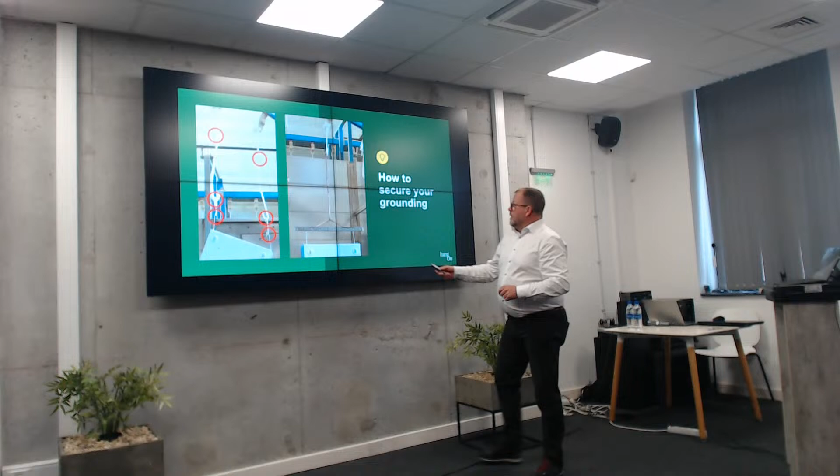You remember the T-bar we had before with the drill hole? Here is another alternative, and this is our alternative. Here is where you hang the hook inside, up here, so you always protect your grounding point. It makes a huge difference in your performance, I must say.

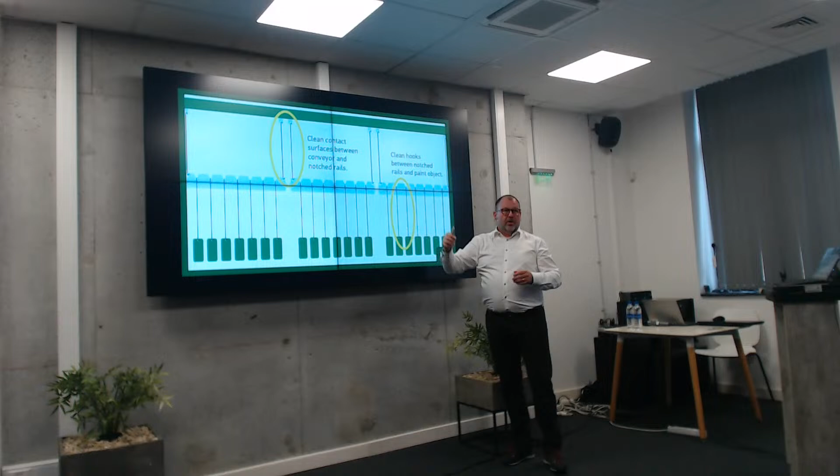And then we come to the plant. Of course, this is not good grounding, but that you know, that's for sure. What you need to do is secure from the conveyor, either from the small tabs on top or from the notched rail. You need to secure good grounding from the conveyor through all the steps down to the object.

And when it comes to the line itself, the conveyor should not be grounded into an electrical cabinet. The conveyor should go down into the soil. You dig down a big copper plate in the soil or pull down a spike in the soil, and that's where you connect your grounding to the conveyor.

And of course, you need also to check from time to time that you don't get powder up in the conveyor track, in the powder booth. That can also happen.

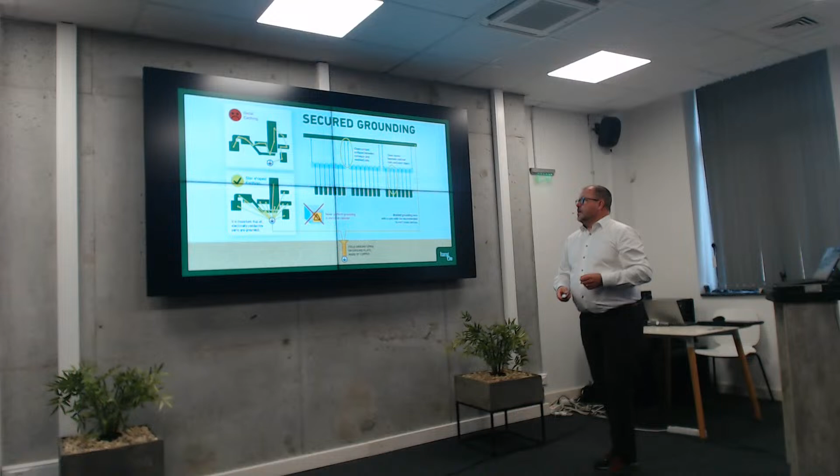When it comes to grounding in the application equipment, you have the choice of a serial earthing or a star-shaped earthing. We suggest you go with star-shaped, because if you get a cut in one line here, there is only one part you need to repair. If you got the cut in this line, the whole application can be without any proper grounding.

Yes, grounding has a big impact. It's very important. You need to secure it to have this productivity. Especially, now we are talking about easy objects. Think of a more difficult object, a cabinet or anything like this, where you should go inside, paint inside. And if you do a manual coating, for example, you can spend much more time to make the same coating operation.

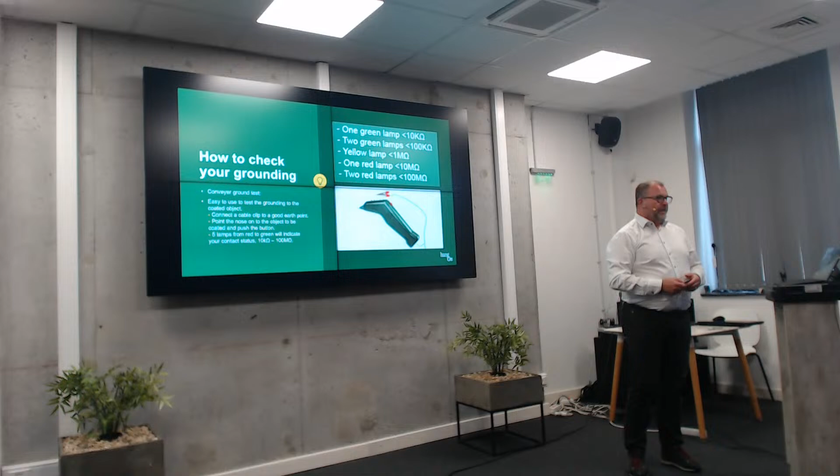All of these things is of course regulated, and what we are talking about is the ATEX system. What many people don't know is that you, as responsible for coating lines, must make a check of the whole line every year and document that everything is properly grounded. But ATEX is so much more. You need to check all these ATEX points every year and make a documentation. And do it. Please do it.

Because if something happens and you have an insurance company coming to you, and they know a little bit about ATEX, they will ask for this documentation. It doesn't take a long time, and you can take help of professionals to do it if you want.

So that was all regarding grounding. Thank you very much. Any questions, by the way? We answered everything, I don't think so. But good, thank you.

So, ladies and gentlemen, I show you the latest technology in powder coating.

Everyone knows we have the hot powder center. We feed the powder into a hopper. From the hopper, we bring the powder over to the guns. The target is to have as much powder as possible on the object.

The excess powder will be recovered and goes over the cyclone. 96% of the powder is coming back into the hopper, being reused, and the small powder particles will be sucked away to the filter and it will be waste.

At Gema, a system looks like this, but you have to be aware it's always custom made. Powder center, cyclone, filter - we adjust into your layout so that it's ergonomical, good to work with.

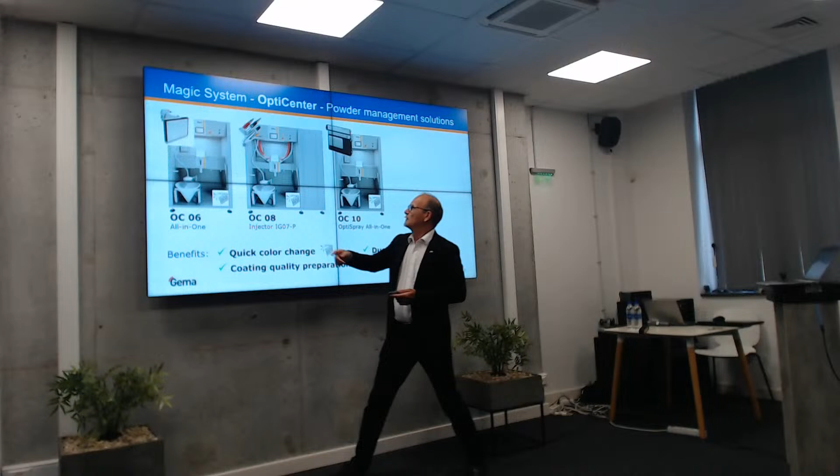Then, at the beginning of the line, we have 3 powder centers. The one that starts with the OC08, this is the conventional one. It works with injectors. Here we have the injectors, and each gun has a control unit built in here.

The more advanced one is the OC06, as you can see, also with injector, and on the lower side it's built together with the control unit. So it's more compact, less space, you don't have this cabinet. This is the first benefit.

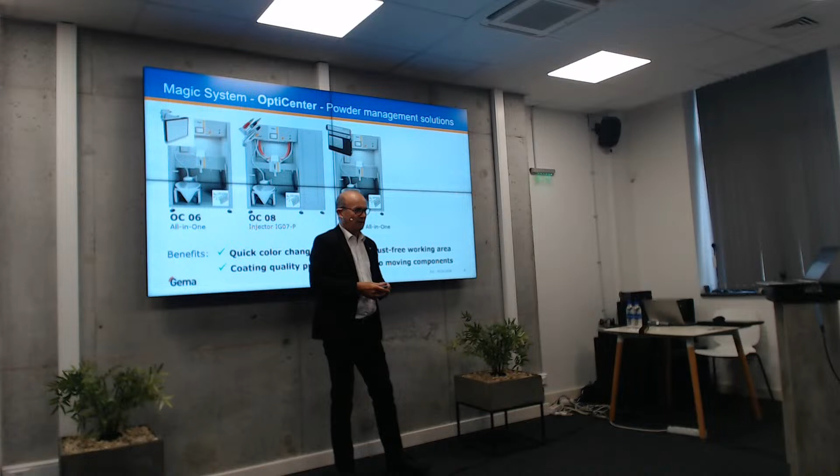Second benefit is also you don't have any tubing from here to the injectors. It's all close together, so it reacts faster, you have a faster trigger time if you start and stop the gun.

Then of course we also built in some other benefits. There's a pinch valve, so you have double the air amount, cleaning the hose and the gun from the inside. There is also a sensor which detects the airflow. But from my point of view, injector is old technology.

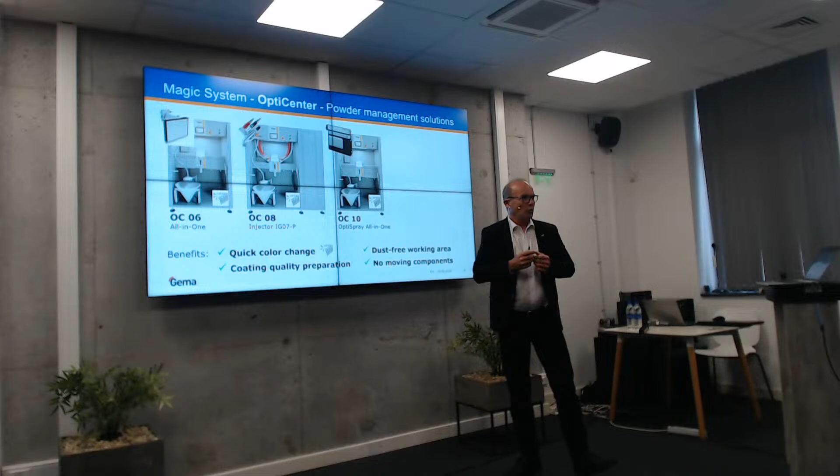For some manual units and so on, it's okay, but I favor the OC10 with the pump technology. I'll show you a short movie clip of the pump technology.

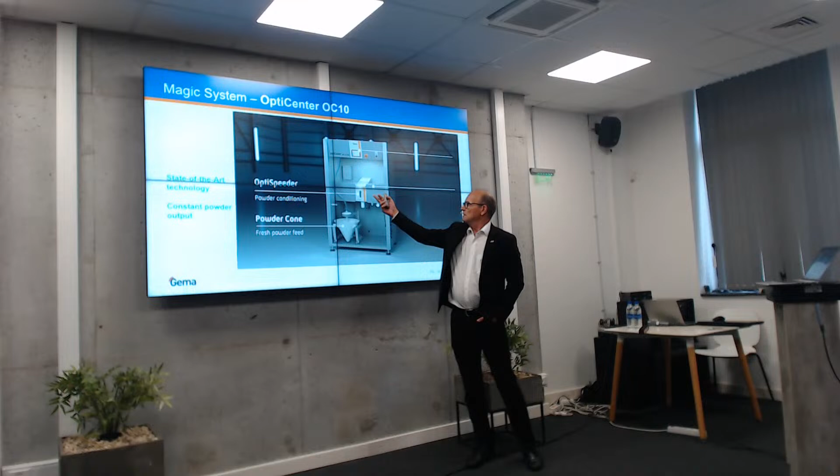This is just for the powder management. I'll come to the details of the pump later on in this presentation. OC10 - we have the OptiSpeeder, powder, comes into this feeder.

And this is the pump built in. The pump has some electrostatic advantages, I'll explain later on. Nowadays the pumps also work very reliably. Of course it uses some spare parts, but the spare parts you can replace without any tools.

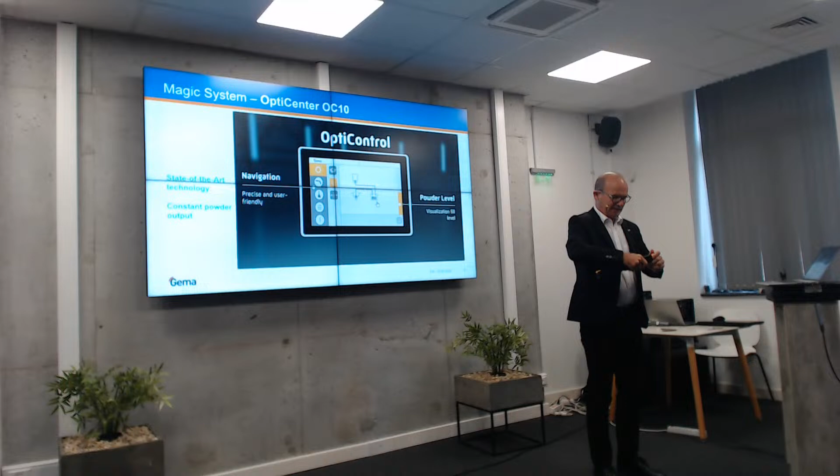Okay. All these powder centers are designed for a dust-free working area, meaning during cleaning there's a suction behind. In operation, it's completely closed, so no powder will escape. A very big benefit also is that on the Gema powder centers, we do not have any moving parts. In the past, we also had some parts, a piston moving, very nice at the beginning, but the powder gets everywhere. Within a short period, you have some problems.

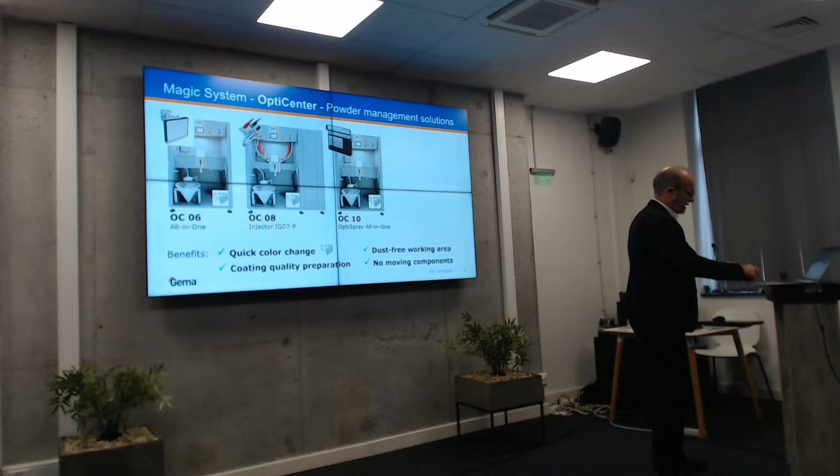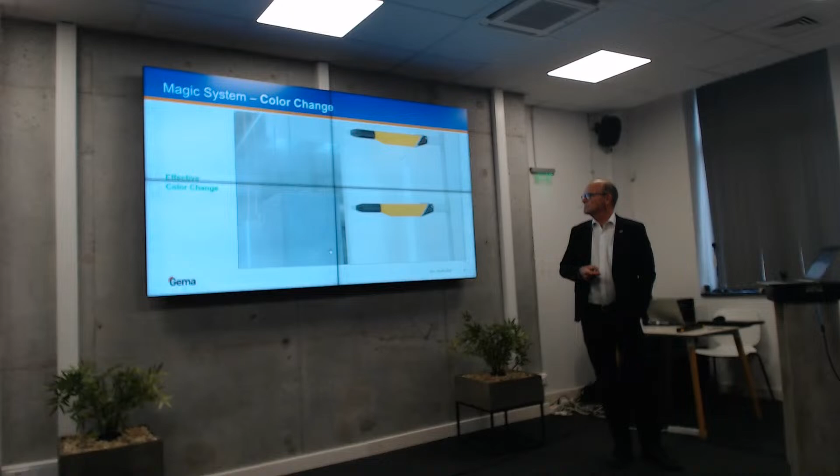So no moving parts. Then we have coating quality preparation and quick color change. Maybe this is also important to you, just to show you how a color change looks. That's applicable for any powder center. Here you see when you open the hopper, it's in operation, fluidization is there. Okay, still spraying. Then we go to the cleaning mode.

On the powder center, you adjust the cleaning. You clean the suction hose; behind there's a vacuum, so no powder will escape. You bring back the powder bag. Now we empty the hopper where the powder is inside. This is going automatically. Then the cleaning of the hose and the gun from the inside takes place. It's fully automatic. If you wanted to go for recovery, then of course you also have to clean the booth and the cyclone.

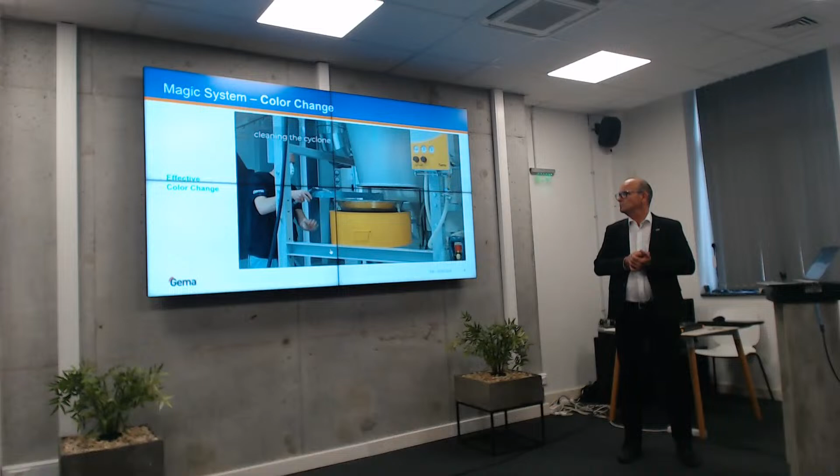Usually I say, if it's working in a good manner, 3 minutes for the OptiCenter, 3 minutes for the hose, and 3 minutes for the cyclone. So cleaning time is approximately 9 minutes. Then at the end you have to replace the powder bag, put in the new one. You're ready to go. Okay.

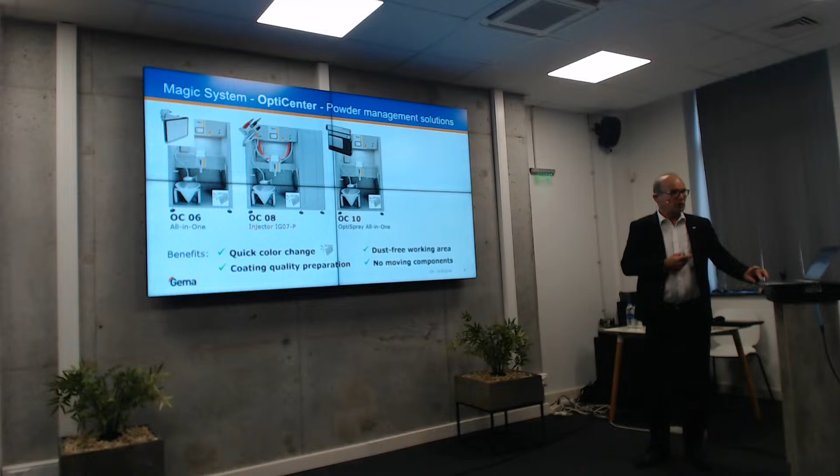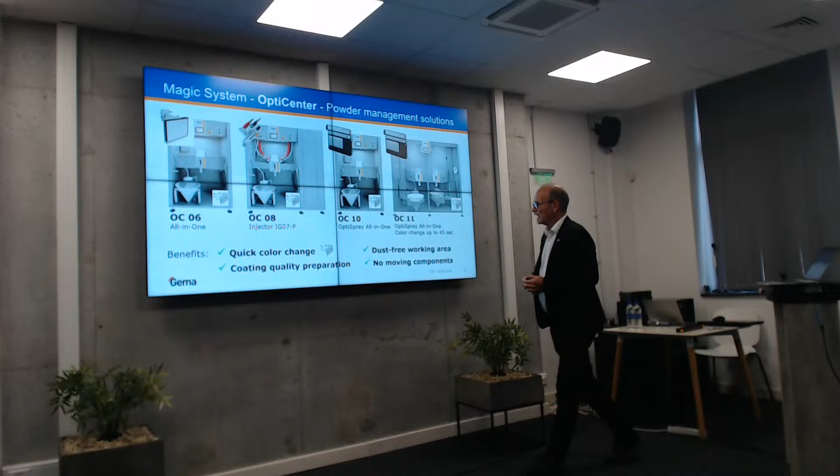Then for the quick color change, you also have the OC11, where you can do the color change within 45 seconds. But that's for the next presentation. Now we concentrate on coating quality preparation, which takes place in this powder hopper. I'll show you this one. In the powder hopper we have very nice fluidization because it's a small volume, easy to control, and you can open the cover anytime to check the fluidization. Each powder is different.

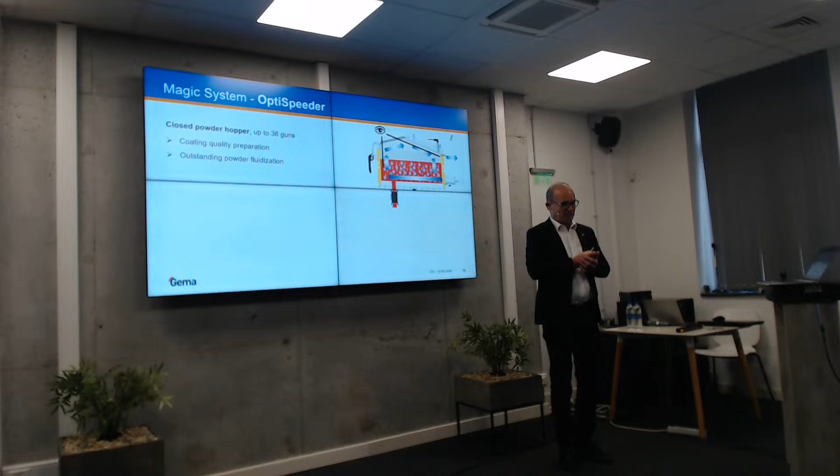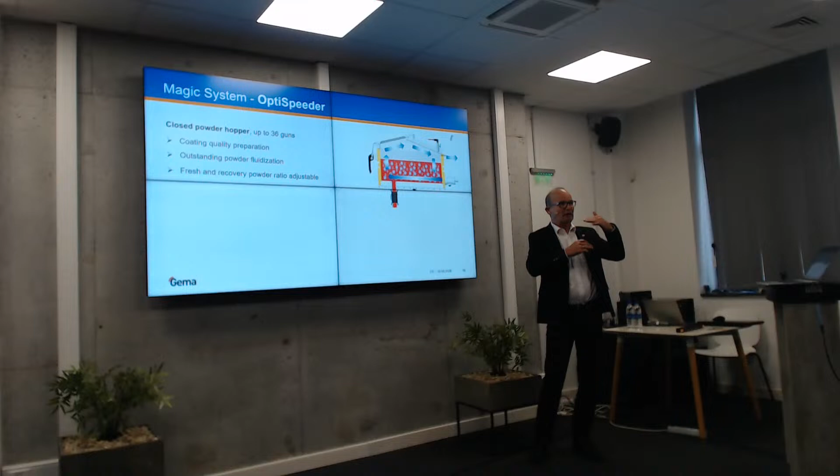Then we have fresh powder and recovery powder mixing. The mixing is constant because we always have the same amount of powder in there. So we maintain a constant quality of powder. Then we have an automatic high quality cleaning. This we haven't seen before because it's done automatically. Gema has a patent to use an airwave to clean this system. This patent also enables us to recover the powder from fluidization.

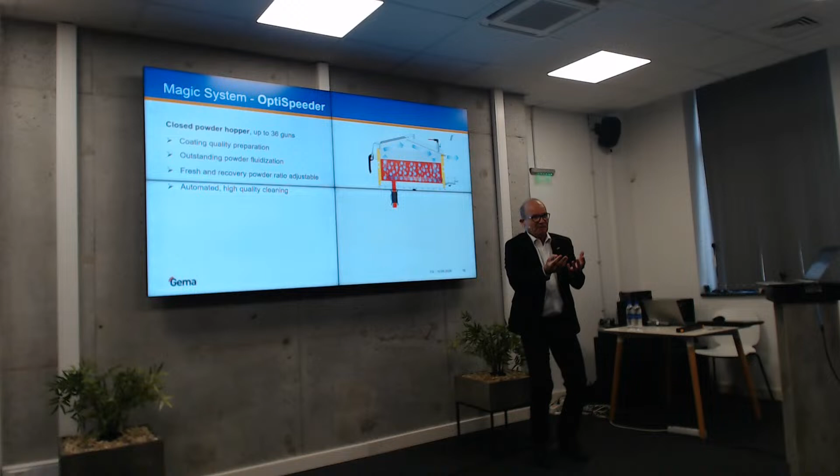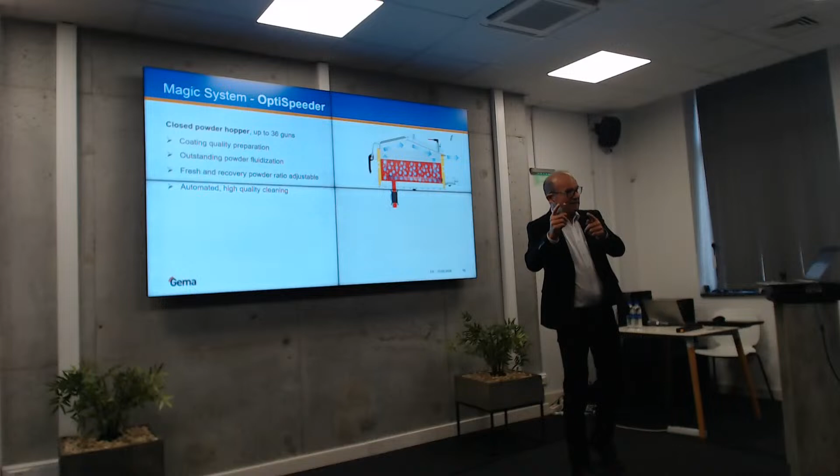During working, you always have some powder dust in the air. This is about 3% of powder. Competitors or other suppliers send it to the waste. In our case, due to our patent, it's always going back to the booth and the recovery. So in this way, immediately you save 3% of powder.

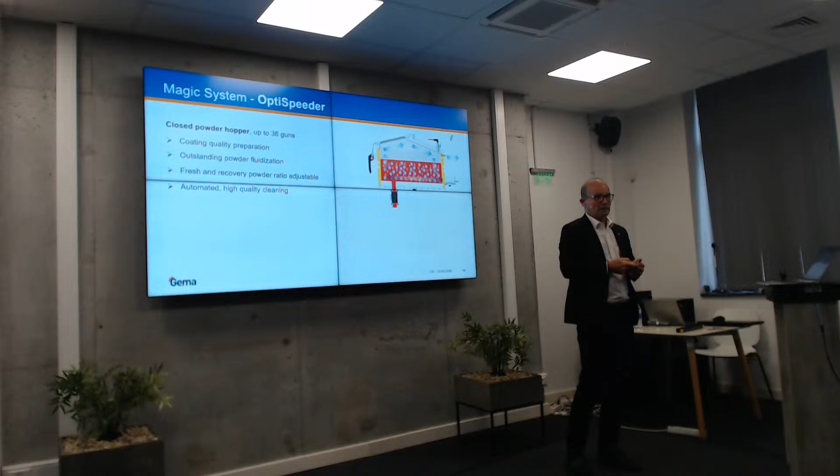The next point is the level is always the same. So we always have the same distance from the powder level to the injector, so always the same force to suck the powder out of the hopper. And then, of course, for high quality demands, we can put in an ultrasonic sieve. Also a short movie clip about this powder hopper. If you open the cover, you see all the surfaces, the walls, the bottom, also the top wall, with one glimpse.

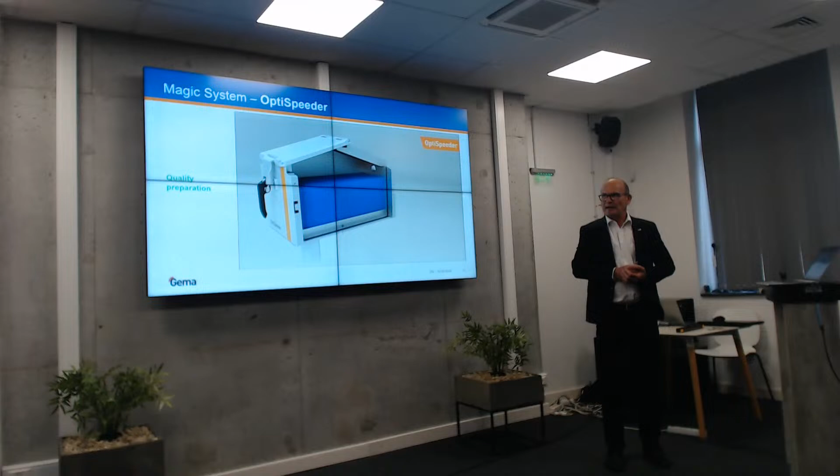Okay, from the side, the powder in there, the level is controlled, then you can also put in an ultrasonic sieve. Ultrasonic sieve filtration. Okay, now we are coming to the electrostatics. I mean, in powder coating, every gun can spray; you can do it better or worse.

What we have new in our electrostatics is the power boost on top. There we can go for a voltage up to 110 kilovolts and 110 microamps. This is not for every application; for aluminium profiles it won't help. But if you have flat surfaces or, for instance, fences, 8 fences next to each other, where you need an extremely high transfer efficiency, then it helps to be faster.

Then the second one, DVC, digital valve control. This is also something unique with Gema. We have this needle valve going into a hole, having 160 different positions. So if you change the powder output or the airflow, it immediately goes to the right point. So there is no delay or adjustment. Also fast trigger time. But most important from my point of view is this PCC mode.

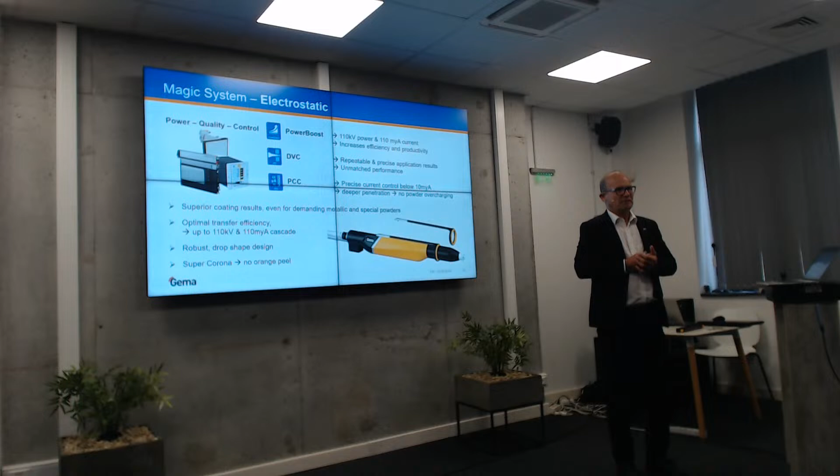And nowadays, I would say 90% of all the lab trials we are doing at Gema is with this precise charge control. This precise charge control helps to overcome the Faraday cage. It's also a very good tool if you have to do some repair coating, and if you have some powder which is easily chargeable, like metallic powder, then you should go to PCC. Okay, electrostatic, of course, comes along with the gun. Now I have a few short movie clips about the electrostatic.

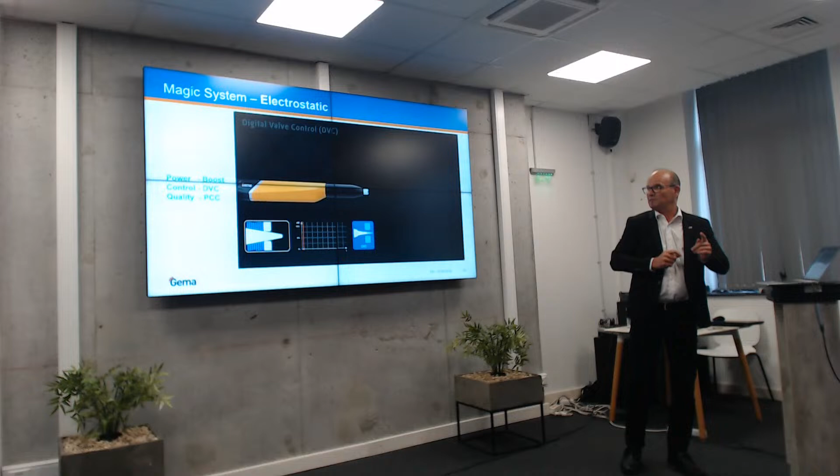First the gun: PowerBoost, DVC, precise charge control is in there. The first one is the higher charging. This is not going linear, but it's going up like this. It really means more power in there, and still fulfilling ATEX, that's the point. Then DVC, very fast reaction time if you change the program, the airflow, or whatsoever.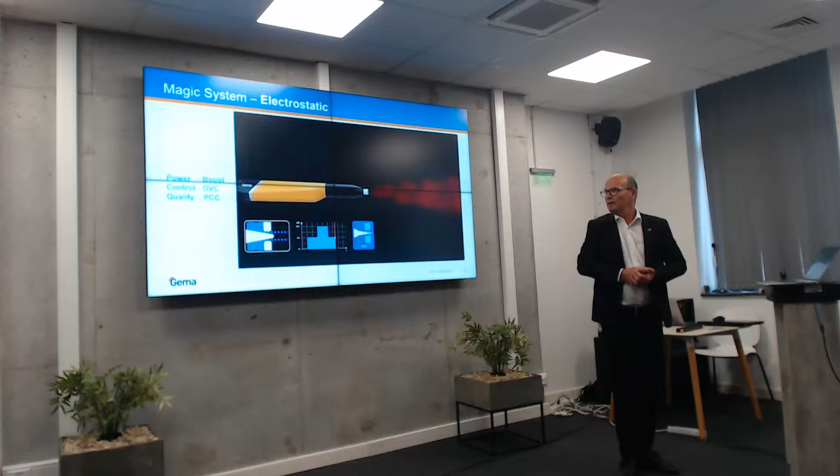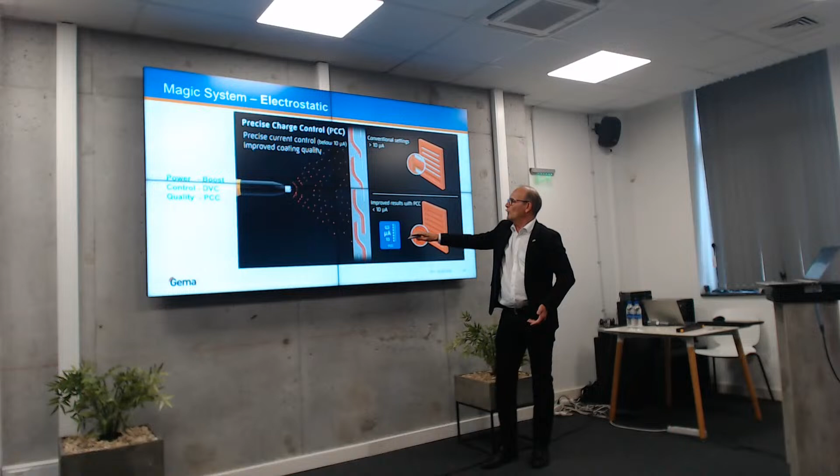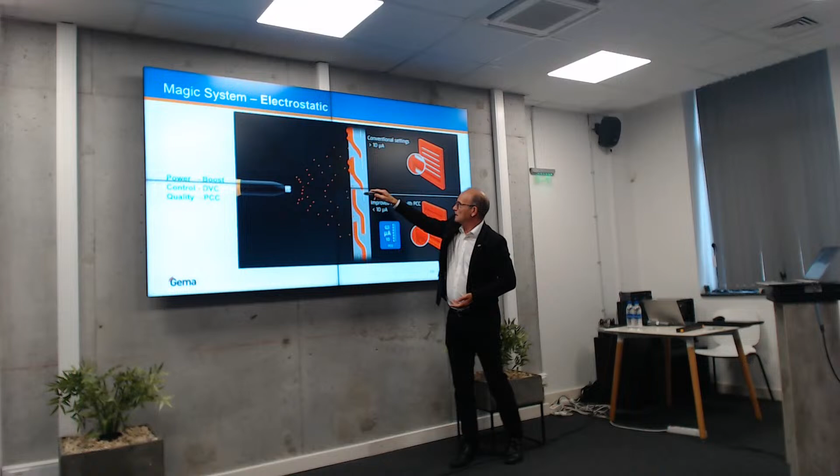And finally, precise charge control. Here on the top, you have higher loading, higher than 10 microamps. Here below 10 microamps. As you can see, if the powder is charged too much, it takes the shortest way to the grounding. So the powder is building up. You may even have back ionization. And if you charge lower, then the powder has the possibility to find a free space to get connected. So in this way, we overcome this Faraday cage, getting into hidden areas. It's a very, very powerful technology.

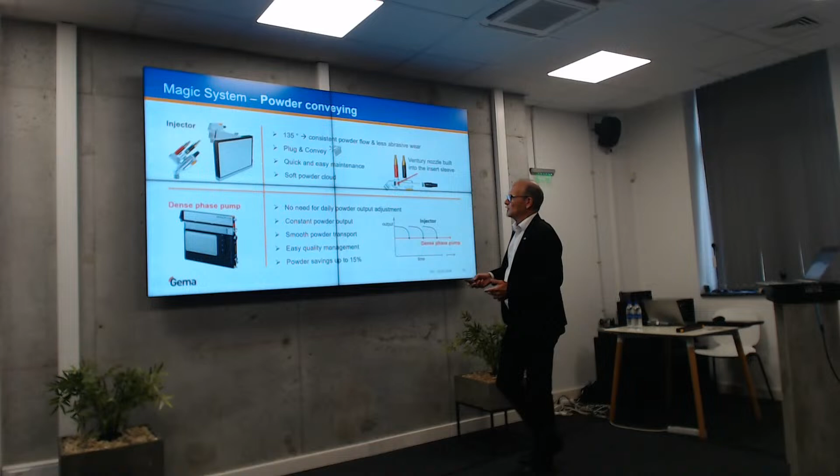Good. Now, as I said, injector technology is an old technology. Though we made a lot of developments, in the last 10 years we had 3 new techniques. We have this 135 angle, less stress to the powder. We don't have to screw anymore, just a click and then remove the insert sleeve. The latest development is that we have these Venturi nozzles in this insert sleeve. So every time they exchange the insert sleeve, you have a new injector. But the disadvantage is the insert sleeve, the hose is getting bigger and bigger, so the powder output is dropping. Then you do the daily correction, it's dropping again. So the output of the gun is changing.

And then what the operator is doing, he just makes sure that he has excess powder on it to avoid waste production. And if it comes to the pump technology, then you have a constant output. And if you have a constant output today, in half a year, or in a year, this gives a big advantage. Then you set, I need 70 microns, you work on 70 microns, and not on 80 or 90 microns. So you save a lot of powder. It can easily be a saving of 15% of powder. And powder is the biggest factor for the costs in powder coating.

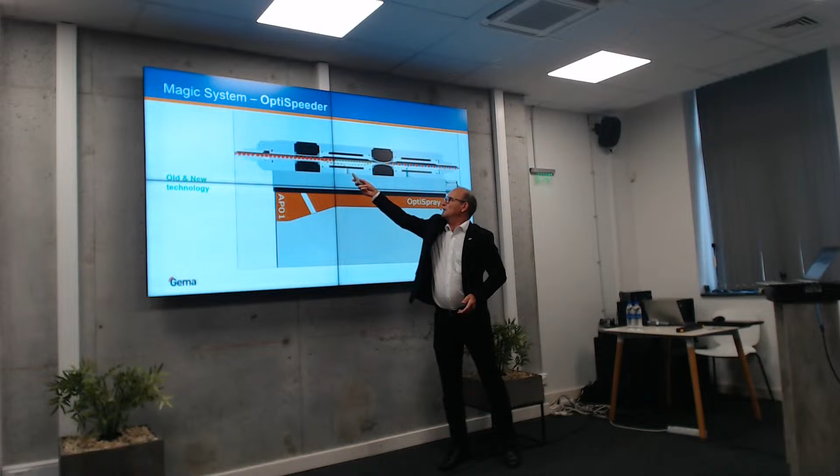Okay, here about the techniques, I wanted to show you the difference. First, this is the pump. We have 2 rubber pinch valves, opening and closing, some fluidized tubes. Here we create vacuum and pressure. Every time we blow air in, we also clean it. This happens 3 times per second.

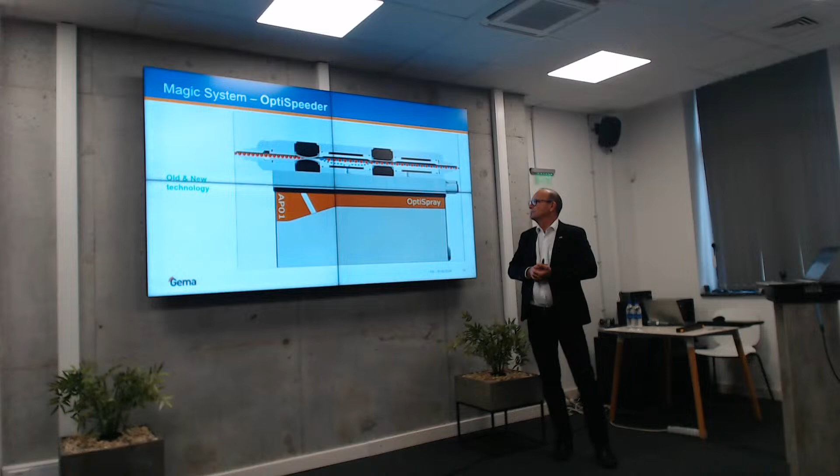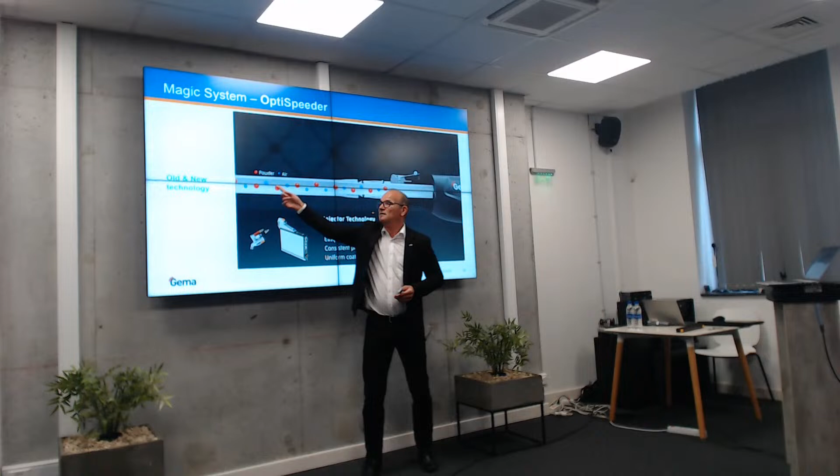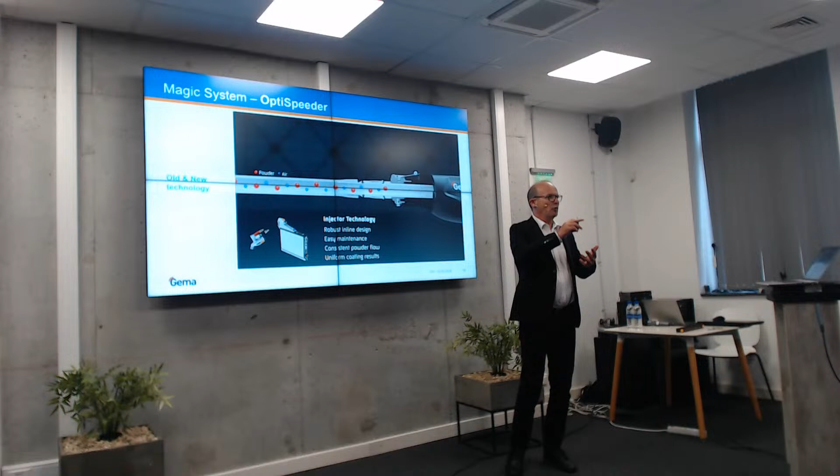So this is the injector technology. With injector technology, the mixing of powder and air takes place at the injector. Then we transport the powder and the air over the hose, up to 20 meters, to the gun. The powder is not very nicely mixed as shown here. The powder is like a sand dune, like the Sahara, and the air is going on top. So on 20 meters hose length, you lose like 50% of powder output. But also a disadvantage is if you change the powder output, if you want to have 3% more, you change it, nothing happens. Then you change more, then the output is changing. Now the situation with the pump is different.

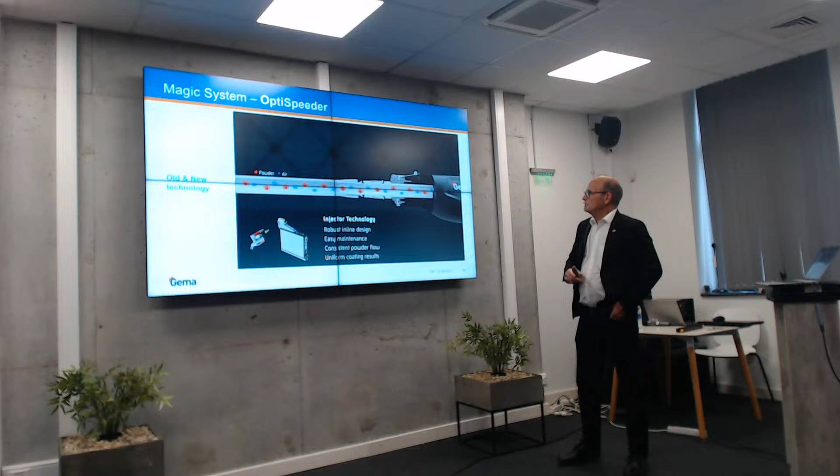On the pump, we have a very thin hose. In this hose, we only have powder and some fluidized air, so the powder is really moving to the gun. On 20 meters, we lose like 3-4% output and not 50%. Then, just behind the gun, we add the additional air to create the cloud, so at the right place.

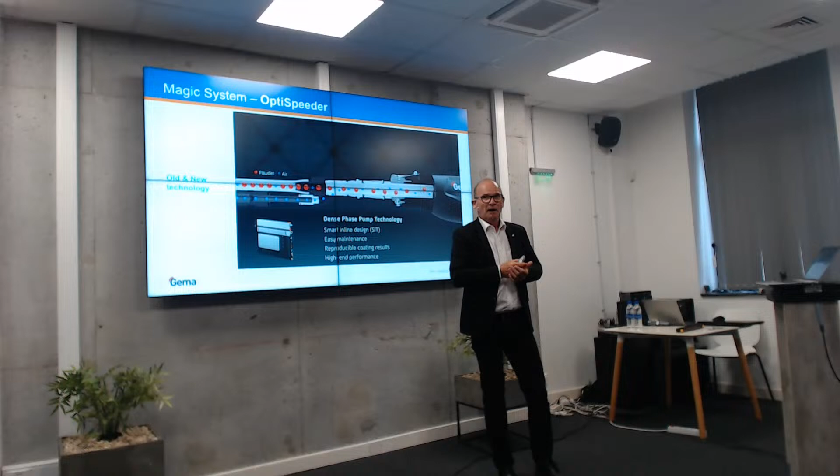This has the benefit, you have a nicer cloud. A nicer cloud you can charge better. You have deeper and better transfer efficiency. And some aluminium producers say even the surface looks nicer, even by eye. Furthermore, I see also a benefit if you change the powder output. Here you change 1% more powder, then 1% more powder output you have.

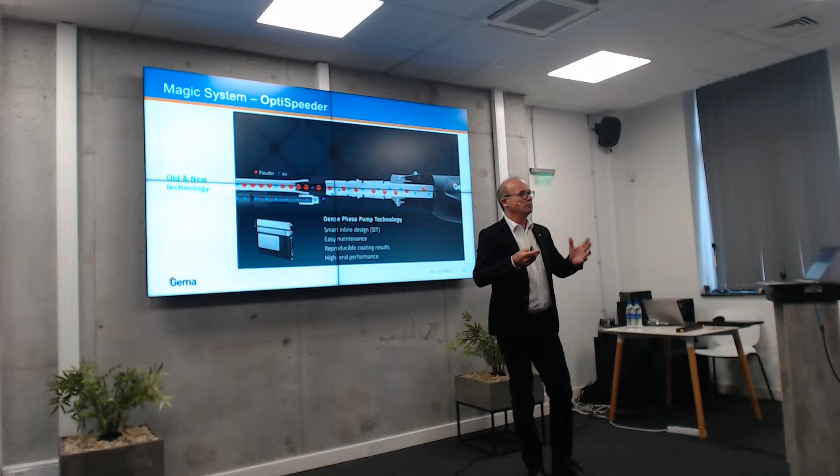The injector doesn't work like that. And for me also important, if you have difficult areas, for instance LED lights, the casing. On the back side you always have the lamellas for chilling. And if you wanted to coat inside, with injectors it will be difficult, because with injectors you always need a certain air volume, like 4.5 normal cubic, to blow out the powder. And 4.5 normal cubic means you blow off the powder in the middle.

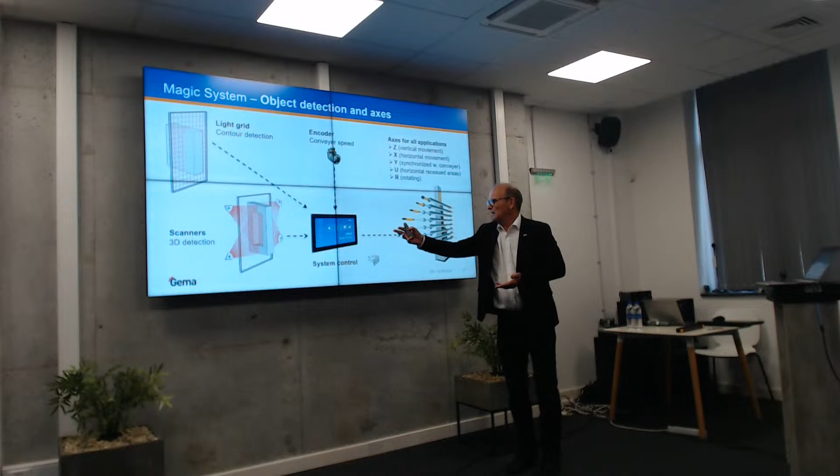And here you can say, I want to work with a very soft powder cloud. Just soft. In this way, you also get a deep penetration into these lamellas. So for me, the powder pump is state of the art today. Then, when it comes to coating, we have light grid detection. We also have scanner technology. Scanner technology is used if each gun has to find the right distance to the object. Everything is available.

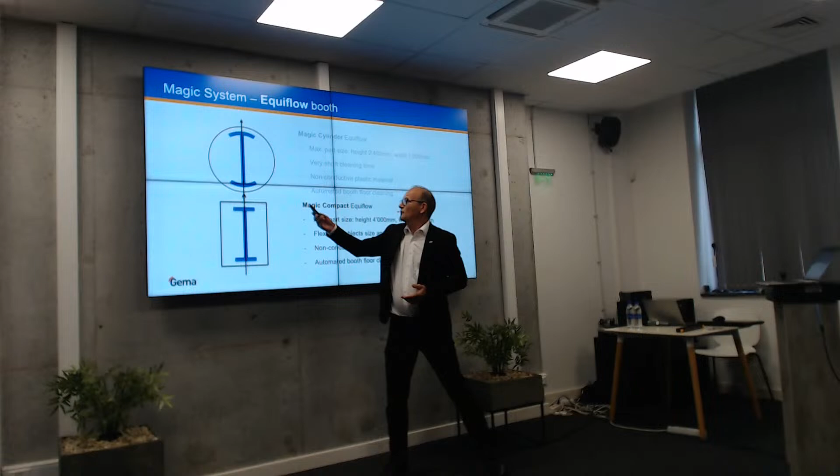Then about the booths, we have two different booth types. One is the rectangular booth, very common. This one gives flexibility. You can put many reciprocators, you can stretch it in the length. Alternatively, we also have this magic cylinder. The magic cylinder has this advantage. You can have maximum 4 gun slots on the side, and in width it takes more space.

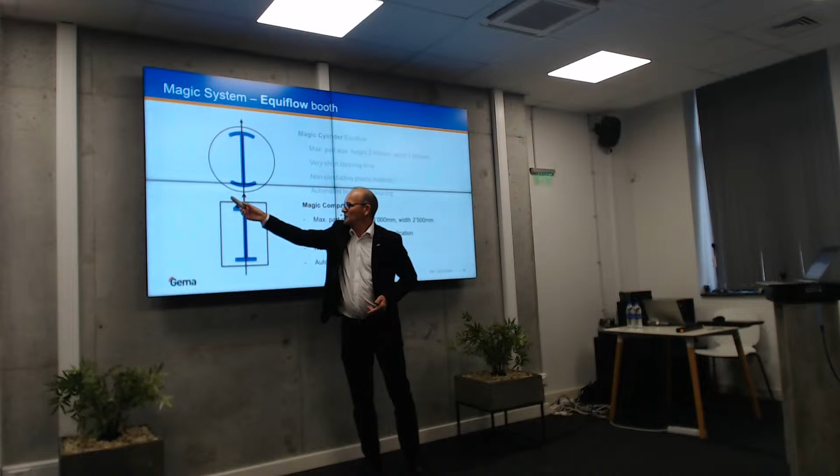But myself, I like this magic cylinder very much if you want to have fast color change. Fast color change because the circle has less surface than a rectangular booth, means faster cleaning. On the cylinder you don't find any corners, so no corners to clean, again faster cleaning. Furthermore, in spraying mode, here the distance from the center to the wall is maybe 800, 900 millimeters, but here it's 1250 millimeters. Means also less powder on the wall, again faster cleaning.

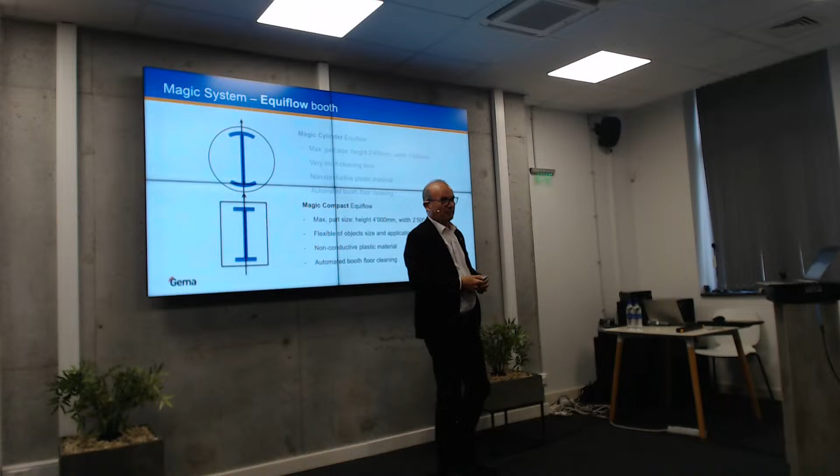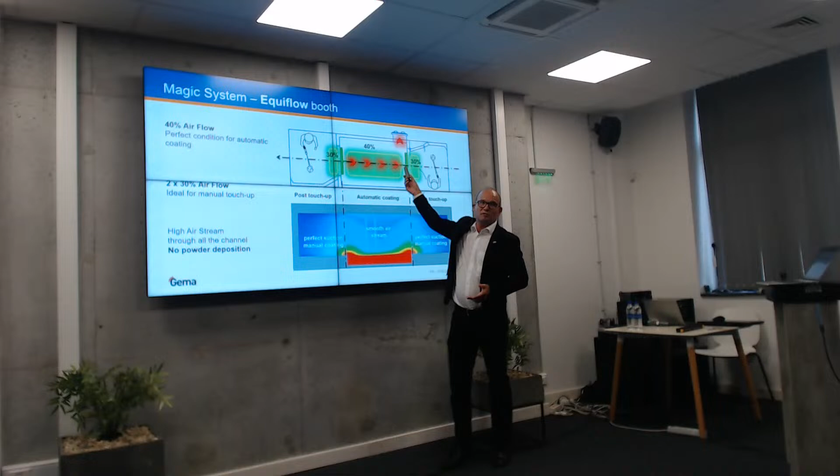Then the booth itself, from the top view, we have the patent on the Equiflow. Equiflow means a very tiny slot in the middle of the booth. This is the top view, and the big slot at the inlet and outlet. In this way, we create a very nice vacuum on the touch-up unit to keep the booth clean, to avoid powder escaping. But here in the middle, where we do the coating, there is a very little airstream, so we do not disturb the transfer efficiency.

Then to control the entire system, we have the CM40 master control. It's ready for Industry 4.0. It's very simple to operate. It's like a cell phone. We have here diagnostics, the lifetime of the wear parts you can adjust. You have the programs. We can communicate with the conveyor. If you give us a LAN cable, we also can have remote access from Gema's side to your system if required. You can send some information to the cloud.

So the production leader of this paint shop can check at home how many hours the line has been in operation, how much time it took to change the color, how many square meters have been coated. What is the lifetime of the wear parts? When do I have to exchange it, etc. Everything is available. So just come to the last page.

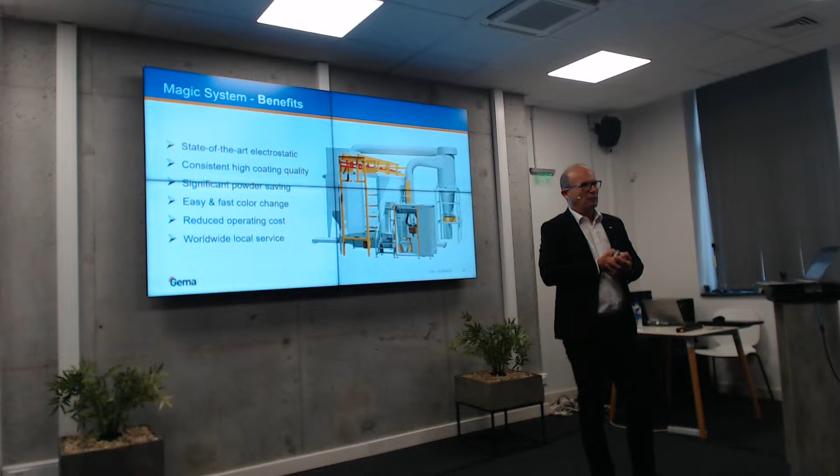I mean here in Bulgaria we have a very good setting, TM Gamasistem has 3 very well trained technicians. They know the Gema system by heart. So this is more or less about the Gema system.

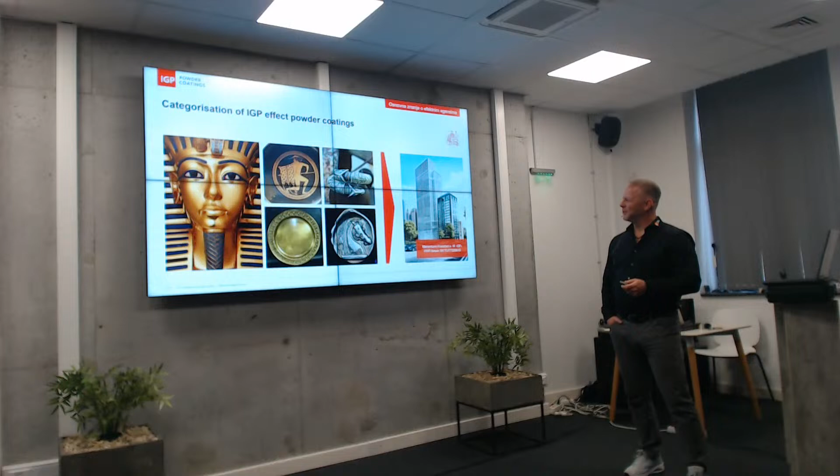And let's see what possibilities we have in the manufacturing process. We have dry blend, we have IGP mica bond, we have IGP premium bond, and we have IGP effectives. What is dry blend? Dry blend is actually a process where we have powder and we add material for effects. So this can be pearl mica, this can be just some dots or just some fibers to achieve some effect.

This dry blend means really dry because these particles of effect are not connected with the particles of powder. So you have very low stability. With such powders, we do not recommend recovery, so that you recover your powder that you are recycling.

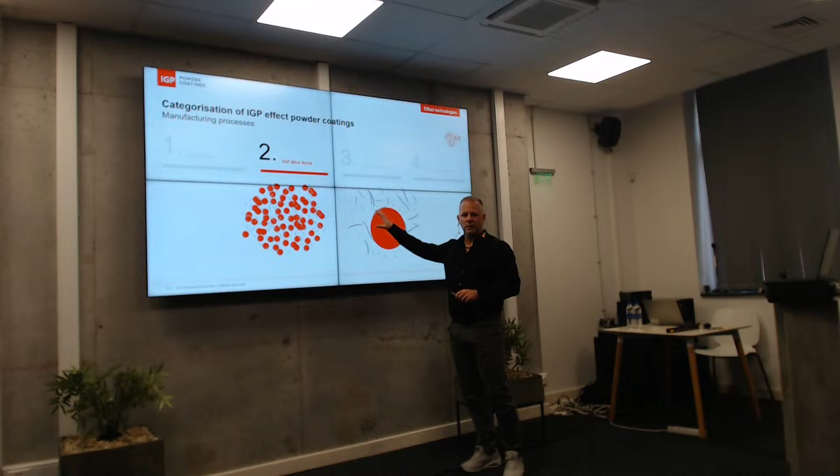With IGP mica bond, this is old technology. Mica technology was first used by everybody who achieved this technology. What we are doing here, we are trying to glue some of these effects, metallic effects, on the powder. But we still have a lot of free metallic effects, as you see. So what is happening, when you coat, especially with, I don't know, around 9006 or 7, you see everything is in the air and you see the glitter, how it's floating.

With IGP Premium Bond, we have achieved better results, better technology. What we are doing here is we are again gluing these particles to the powder. We have to go once again through the thermal process so that this metallic effect can stick on the powder. Nevertheless, here you still have the same problem as with mica technology, that as you recover the powder in the cyclone, we have big forces there, and those little parts of metallic effect will break from the powder. So we don't have 100% stability.

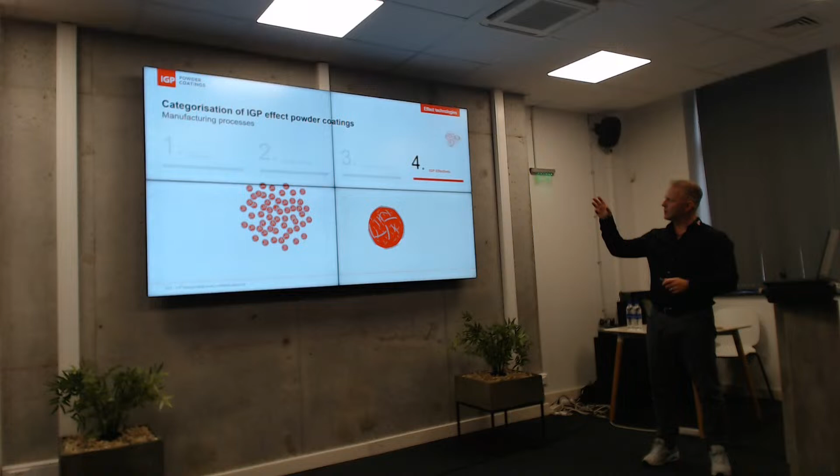And then what we achieved with IGP effectives, this is the technology which only we have developed until now. Here we managed to glue these particles, metallic effects, directly to the powder, and you cannot break them. It's actually not a bonding process, because that would mean again the gluing, the thermal process. This is a special process to produce a powder with a metallic effect. You don't have any free metallic particles near the powder.

So what happens with normal powder? We have here two photos. You see on the left side, we have fresh powder, and on the right side, we have recovery powder after 1 cycle. This is 250 times magnification. You see there, we have a lot of these metallic effect particles in the powder. Here you see 2 of them. That means we are losing that metallic effect during the recovery process.

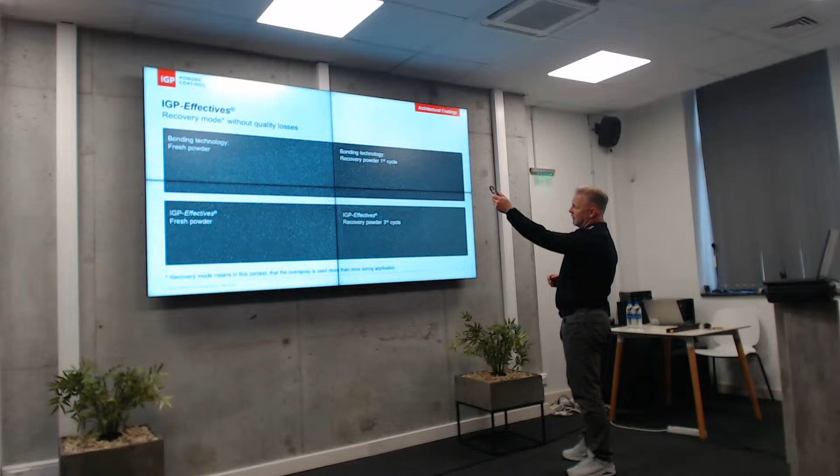What happens in recovery mode, if you compare now the bonding technology to IGP effectives, you see the difference in the first row. It's one-time recovery, one cycle, and with IGP effectives, we made recovery powder. We made 3 cycles, and the powder still has the same appearance.

Color and effect differences, you see, may occur using standard powder in case of different coating materials, coating lines, ratio of fresh and reclaimed powder, coating settings or charging. With coating materials, you know, if you coat steel or aluminum, you can have different appearance.

Mostly you see that if you use some colors which are very difficult to apply with enough thickness, like some yellow colors, and if you don't have enough thickness, then you say, why is it so green? It's green, yes, because you see the surface through the color, because yellow color needs more thickness. Also, white color needs more thickness. With white, you need at least 80 microns to be covered enough. How do we measure that? We measure it in such a way that we paint a white and black sheet.

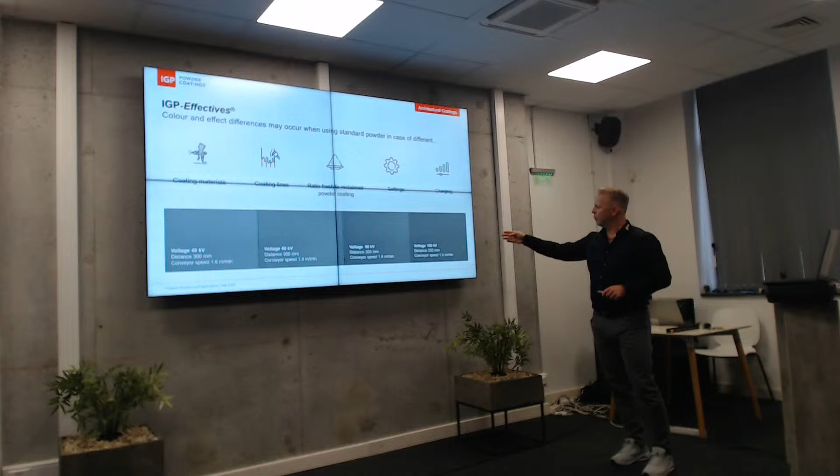When you recover normal powder and if you do not add enough fresh powder at the beginning of the day, you will have a lot of metallic effect in it, and during the day you don't see the difference, you know, but at the end of the day you will have a powder with less metallic effect in it. And if you compare the sample from the beginning of the day and the end of the day, or the working shift, you will see you have 2 different colors. This is what doesn't look good later on a building.

We have also done it. I presented such a test at one company. We coated a few sheets with automatic guns, and then also with a handgun. The handgun was taken by a guy who had been 2 days at that company. He didn't know anything about coating. He just took the gun and was waving with the gun, and we said, "Please don't do that." With normal bonded powder, it was a disaster. With Effectives it was a really great result, the same as you see here.

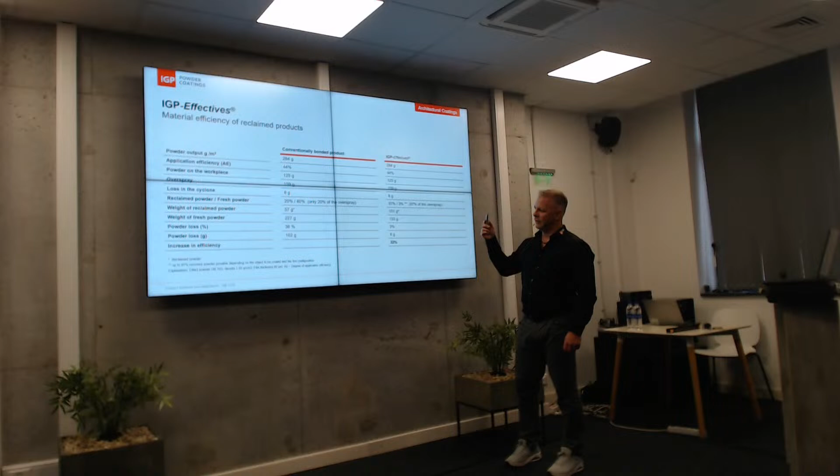At the end, weight of reclaimed powder is 57 grams. We have to add 227 grams. With Effectives, we only had to add 133 grams. So at the end, we had much less powder loss with Effectives, and you can increase your efficiency by 33%. So you can really recover this powder all over again without adding any fresh powder. So you can also save money with Effectives.

Please look later at our samples which we have brought here. You will really see the nice flow of these colors and also the scattering of this metallic effect. It is really nice scattering.

Okay, now the second presentation, also something about savings, is our new series IGP Dura 1, also known as Keep Cool Take 1, or 1 as 1 for all, because in this series we will offer you every possible surface with gloss. So, overview. Unpredictable price trends for electricity and gas a few years ago forced us to do something about that. And we decided to offer you powder where you can save money. So with this Dura 1 series, you can lower your curing temperatures, you can increase your processing speed or benefit from increased reliability, so you can use both.

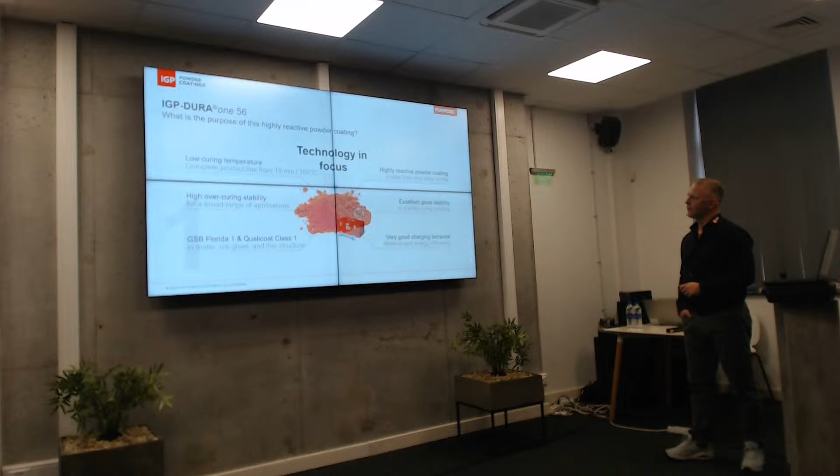So why choose IGP-DURAone? What purposes does this highly reactive powder coating serve? What are the technical properties? How can you unlock greater efficiency? Let's see. So, technology in focus. This is a highly reactive powder coating. It is faster than any other series. It has excellent gloss stability in a wide curing window. So you can change your temperatures how you want, and it's stable. It has very good charging behavior.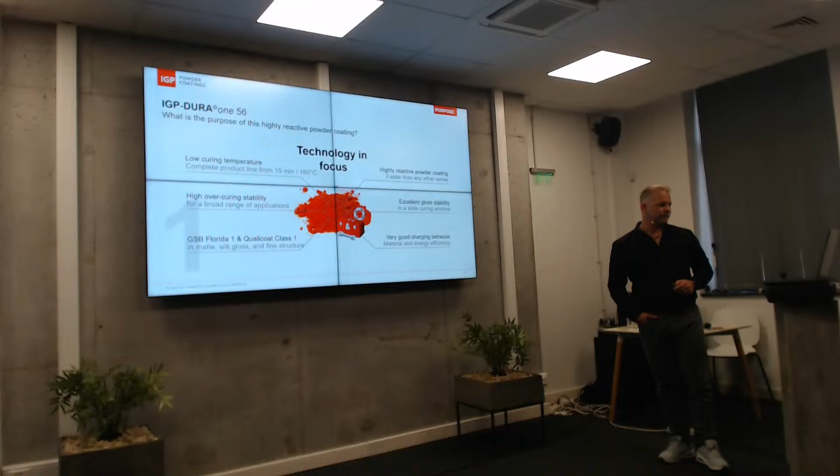So we offer material and energy efficiency, low curing temperature; the complete product line goes from 160 degrees. You have high overcuring stability, and this is also certified GSB Florida 1 and Qualicoat Class 1 in matte, silk, gloss, and fine structure.

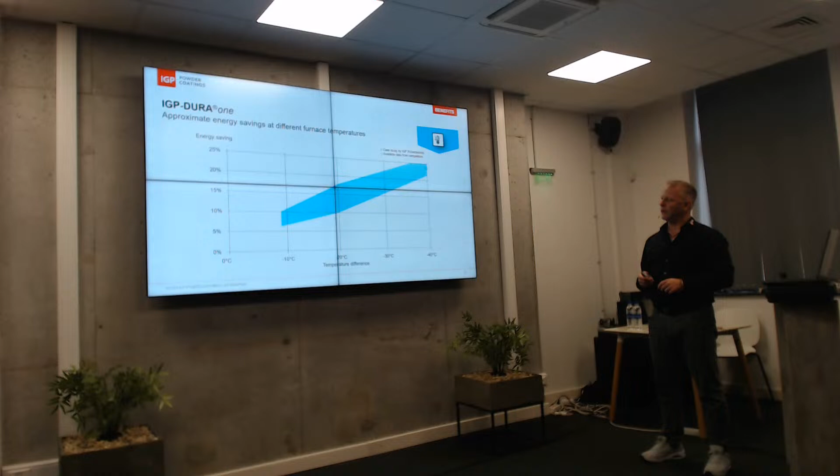Approximate energy savings at different oven temperatures - these are case studies by IGP and also available data from our competitors. If you reduce your oven temperature by about 10 degrees, you will save about 8%. If you reduce it by 20 degrees, you will save about 15%.

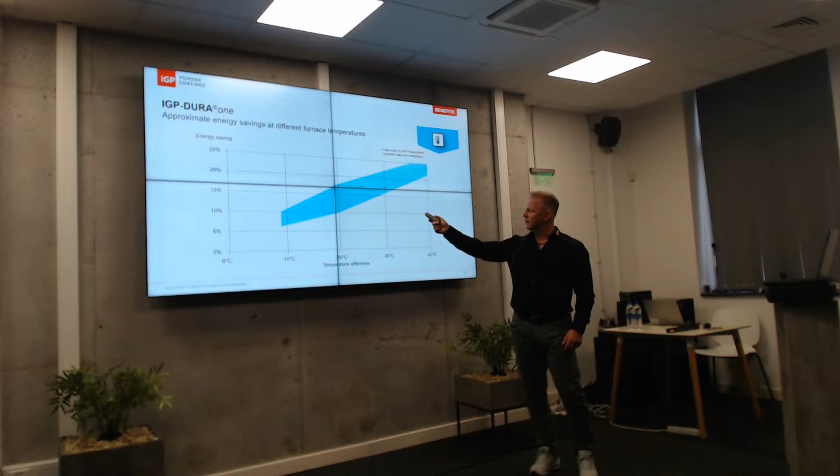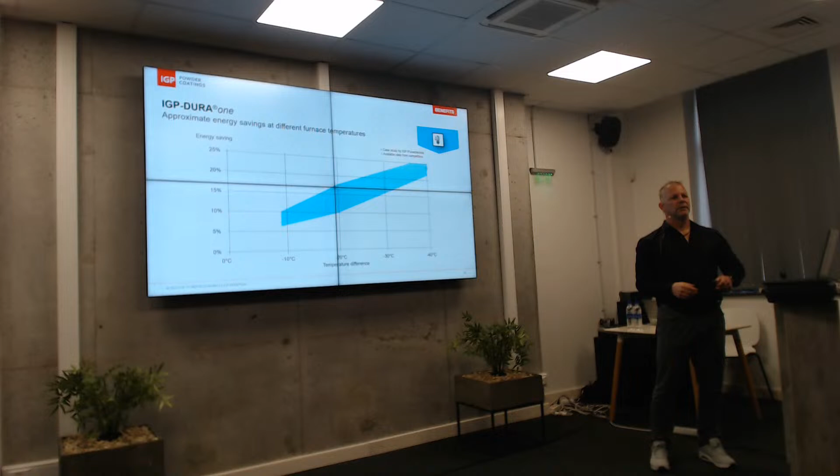Data from a colleague of mine from Scandinavia: they measured the gas consumption on their line, turning on the oven for 4 hours of work. At 200 degrees they spent 12 cubic meters of gas. They reduced it by 20 degrees to 180 and made the same test the next day - turning on the oven, getting to 180, and running for 4 hours, they used 9 cubic meters of gas. I think it's worth mentioning.

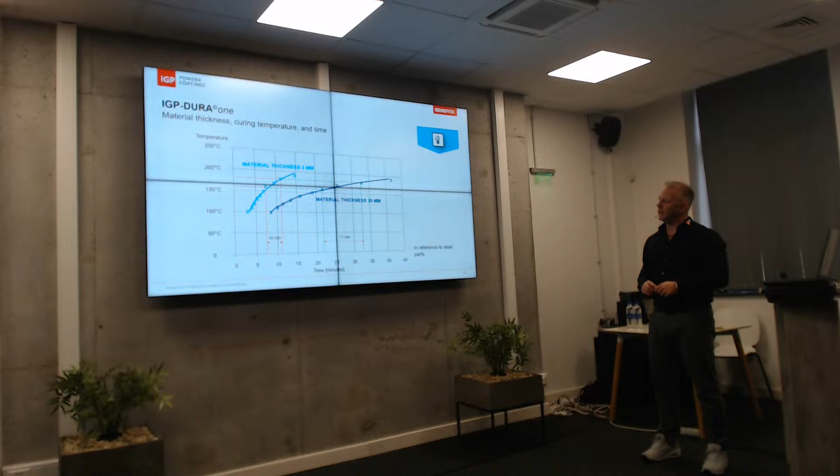Next, material thickness - what effect does it have? At 180 or 160 degrees with material thickness of 3 millimeters, that means on average 5 minutes. So you see where you can save time getting to the temperature. With material thickness of 20 millimeters, you are 11 minutes faster.

Now, how can you allow for greater efficiency? This is a theoretical example with oven temperature 190 degrees, total furnace length 70 meters, coated steel with thickness 5 millimeters. This is an example for standard powder, 10 minutes at 180 degrees. After 24 minutes you achieve 180, and you stay in the oven another 10 minutes. So you need 34 minutes to cure your powder.

With Dura, 15 minutes at 160 degrees, you need just 13 minutes to achieve 160. Then we need another 10 minutes - why 10? We said before it's 15, and we're only adding 10. This is due to the cure index - if you're doing oven measurement, the device also calculates the curing index.

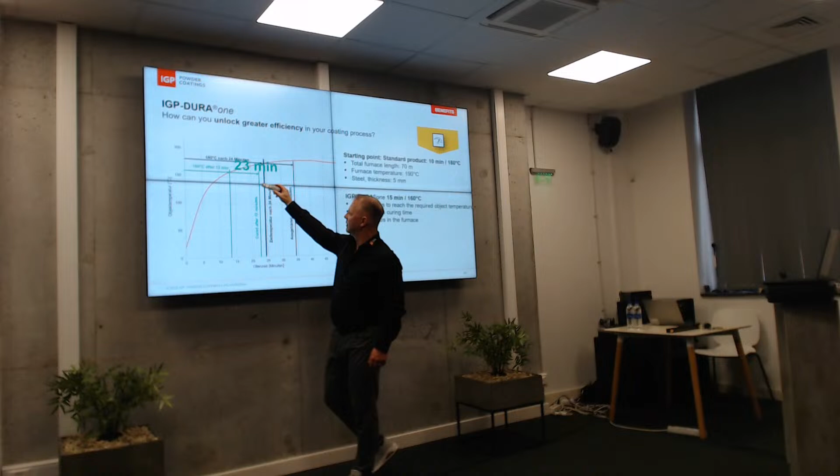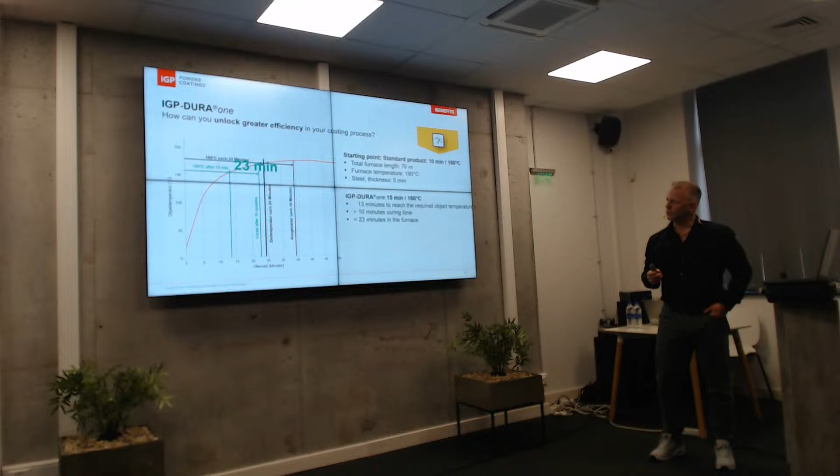The device also calculates all the higher temperatures that you pass through. You're not on 160 the entire time - you're also at 165 and more, even getting close to 180, and it calculates that. So in that case, you would only need 10 minutes for your objects to be cured. That's a 32% time saving in that case.

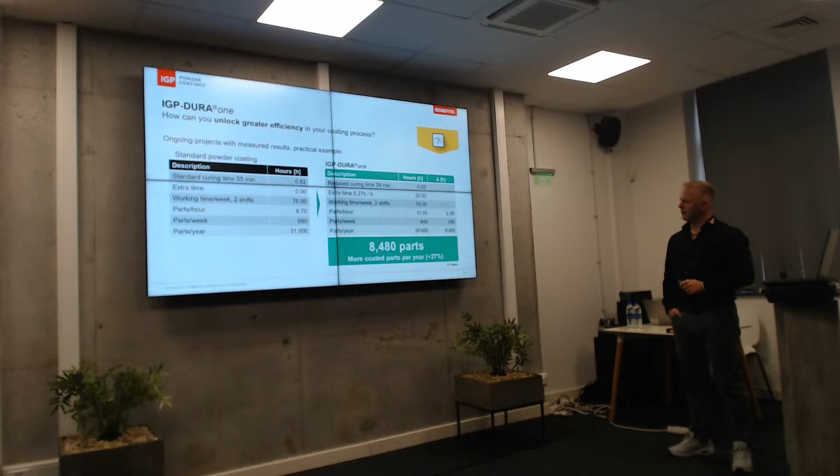This is per hour, and this is per week - 180 parts more per week. Per year, he could coat 8,480 parts more. This is 27% more coated parts in the whole year. So you can save money.

What do we offer more? Besides this curing window, as you see, from 160 to 180 degrees, we also offer a speed curing option - this is 3 to 6 minutes at 180. So this powder is really very good and stable at higher temperatures.

We have also tested these powders at 210 degrees for half an hour, and the gloss didn't change. So it's really good and stable.

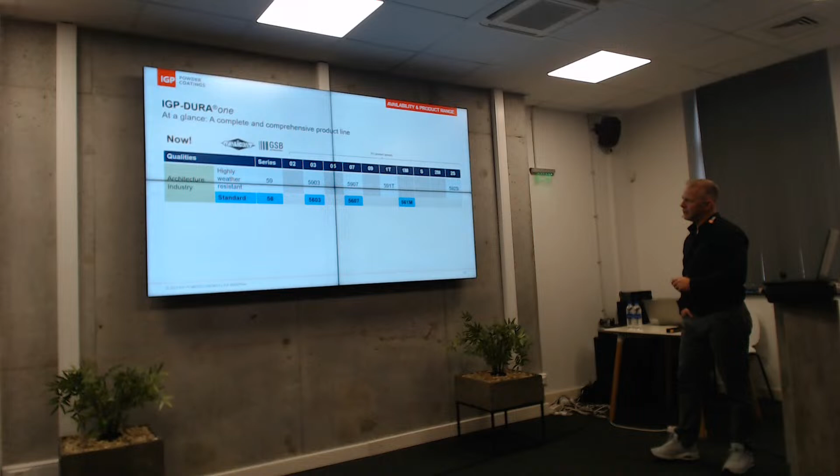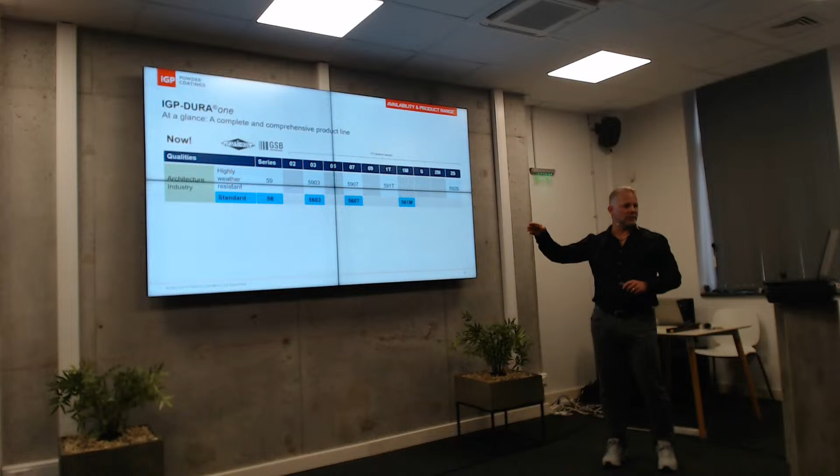What we are offering is a complete line: we have fine structure matte, we have matte, we have silk gloss - or how you say, matte, nemat, matte, nemat. We also have an industrial quality outlook: high gloss, smooth, fine structure, deep matte, smooth silk matte - this is about 50 gloss units.

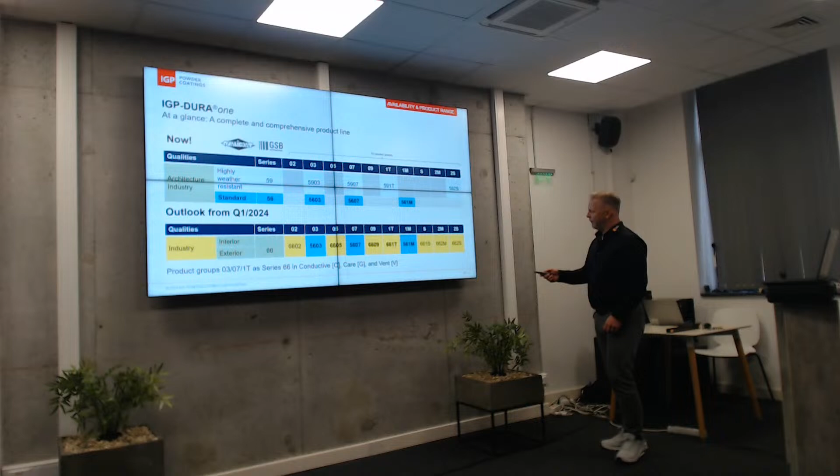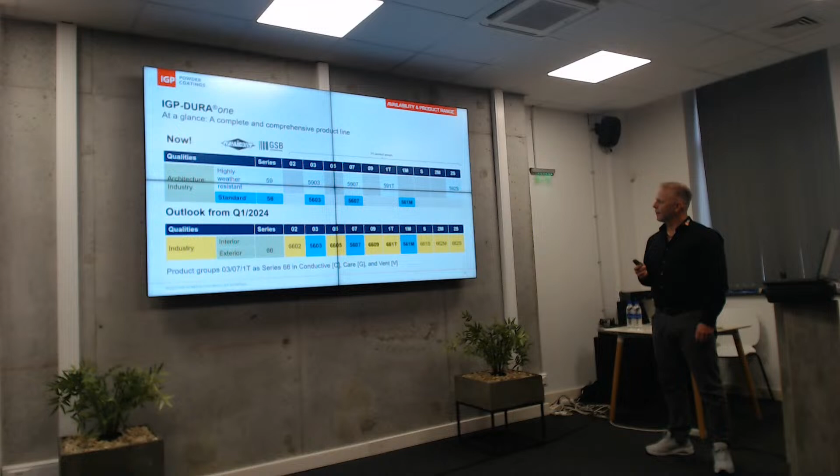What is still to come is matte with approximately 20 gloss units, then fine structure with silk gloss, and we hope by the end of next year also an outdoor quality: coarse structure matte, coarse structure silk gloss. This is already what we offer.

So this is all about this one. Keep cool and take one. Thank you.

If you have any questions, please keep it for yourself - no, we can still talk later also.